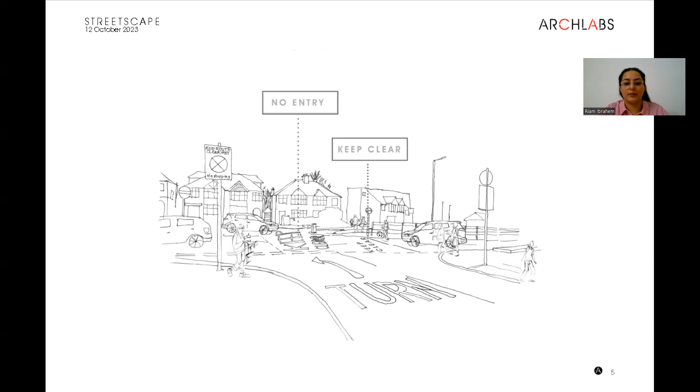It's an unsafe crossing on a dual carriageway in Edgware, before the roundabout, which is right there. People just cross from here to there, and mostly the people affected by this crossing are those who live on the closed road, which is here.

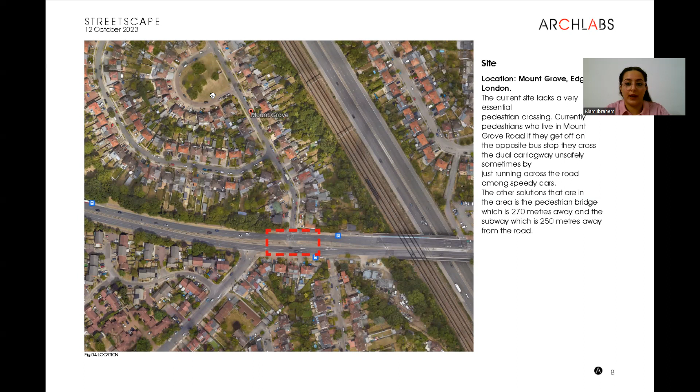I'll show this next. This is the location of the crossing, and this is the closed road, called Mount Grove, in the area HA8.

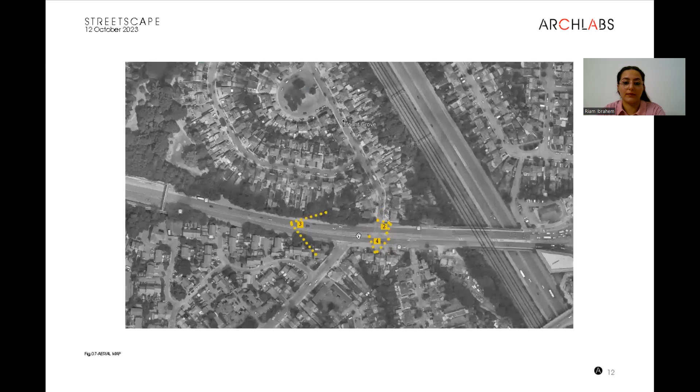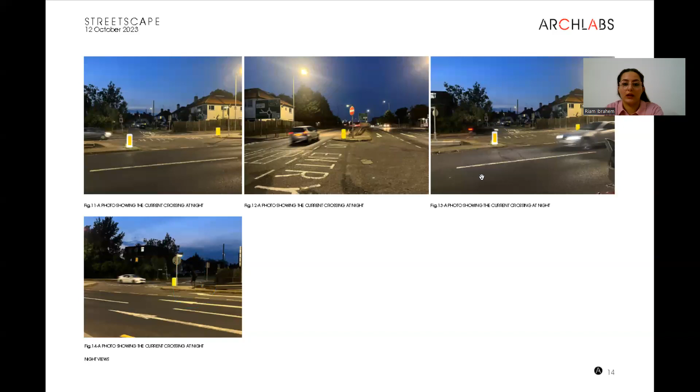You can see a guy here crossing there. There he is. Okay, very unsafe, very dangerous.

The issue is that the people who live here, even if they want to use a safe crossing, are very far, 250 meters away from the road here.

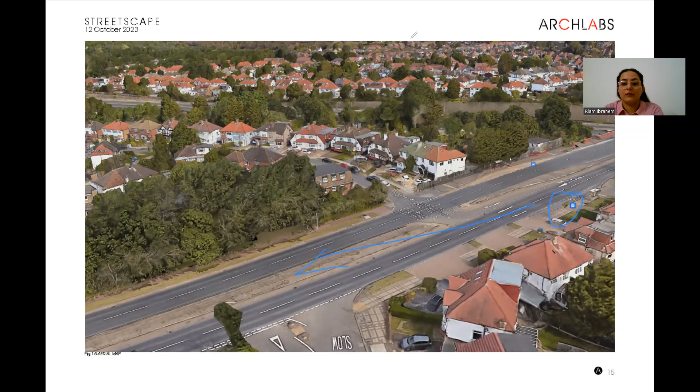And if they want to take a bus, the bus stop, which is here going that way, they would also need to use this crossing.

These are a couple of site observation sketches showing the people. This is from the closed road looking at the crossing, which is here. This sketch shows the closed road, Mount Grove, and the crossing in the background, which is here.

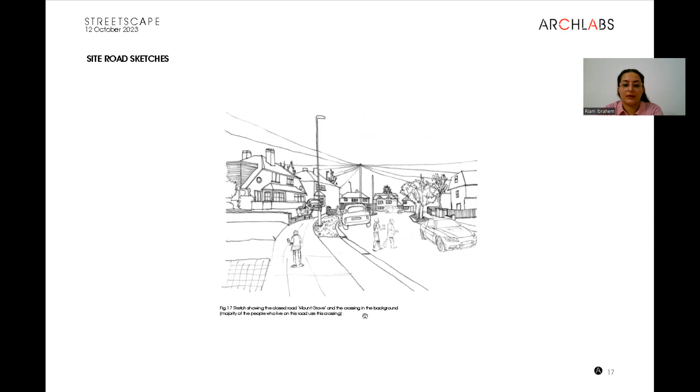The majority of people who live on this road use this crossing, like I explained earlier. This sketch shows the opposite road, which is here, and the unsafe crossing.

This sketch shows both, partially this side of the road and the opposite side.

It does say no entry for cars, but there's not much precaution for pedestrians or cyclists, really. So it's a road designed for cars only, I feel.

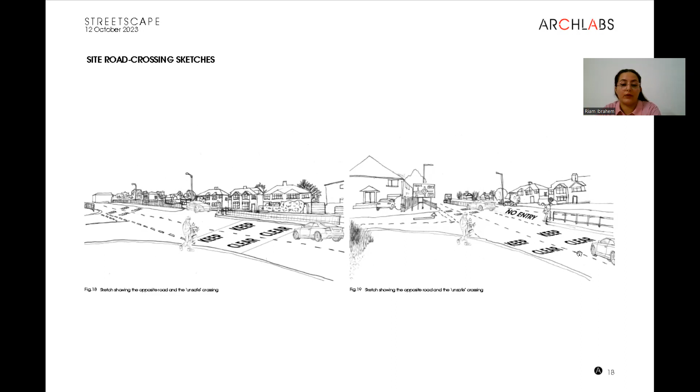This illustration shows the unsafe crossing, and you can see the pedestrian bridge there, which is 270 meters away from the closed road.

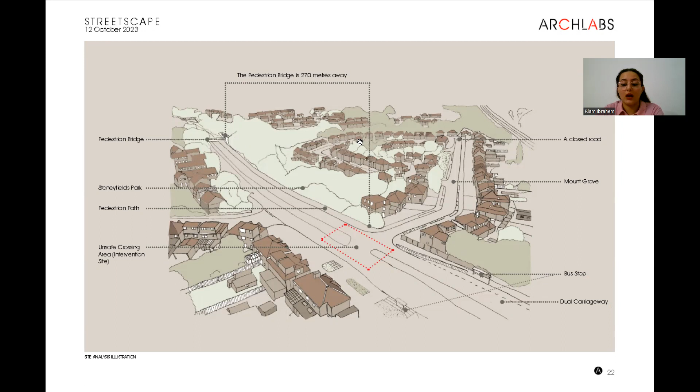There are 2 bus stops, and there is a park there, so there are some kids around the area.

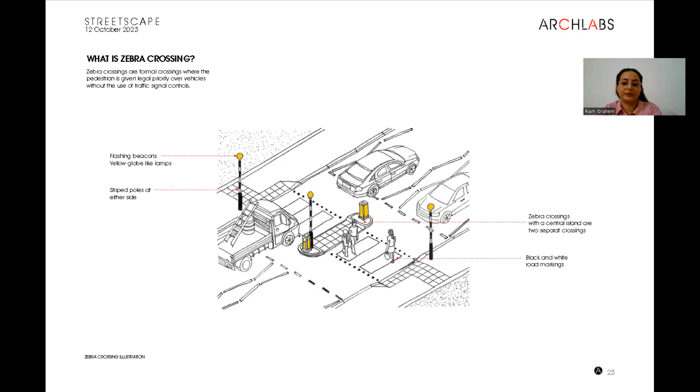So I was planning to propose a zebra crossing into this, which I felt would be a minimal intervention.

So I went ahead and started brainstorming into a diagram. What is the project looking at?

It's looking at a passage that connects the two areas for cyclists and pedestrians, a place in Edgware, though it could be anywhere.

It's an architecture, a light structure — and what about the shadow? It's for local people; cars have no entry. How safe is it? It's a scene.

So I'm looking at the event of crossing, and a scene. It's a modern piece of architecture.

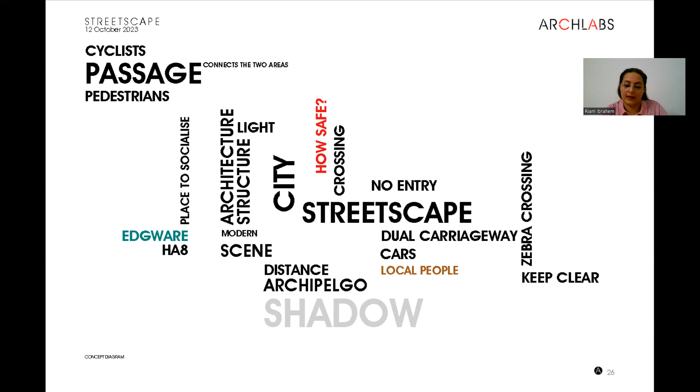Like I said, the precedent architect I'm looking at is Bernard Tschumi. He's an architect and theorist, and one of his most interesting projects...

...is the Advertisement for Architecture, made in 1976: 'To really appreciate architecture, you may even need to commit a murder.'

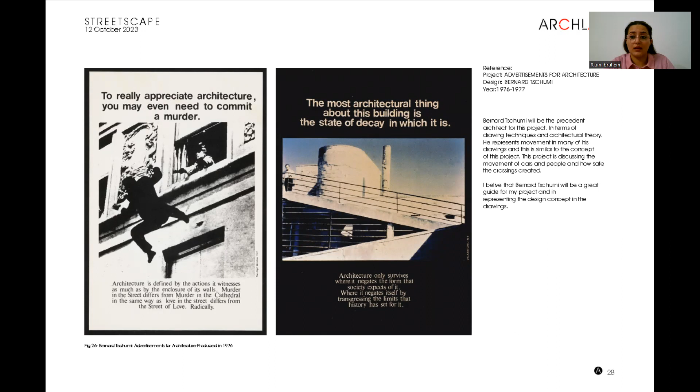And this kind of shapes my path in this project, because it's a matter of questioning how safe these crossings are for people, and the event of actually crossing.

And how he sketches, how he draws these, kind of makes them into little drawings, like storyboards.

Which I am planning to follow in my own drawing style as well, asking: how safe is the event?

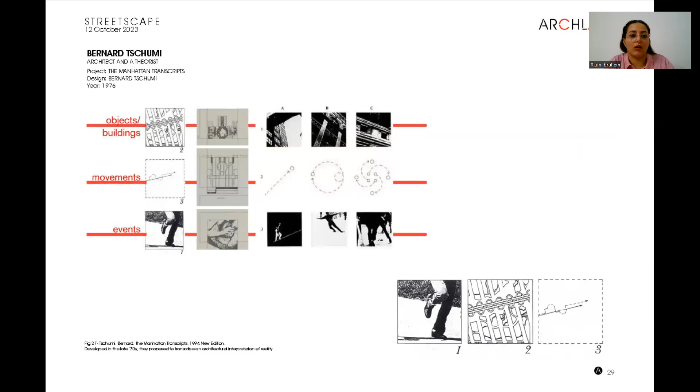So I started doing that right now in my sketches.

First is the event, which is the event of actually crossing, and number two is the object, which is the crossing itself, which you can see here.

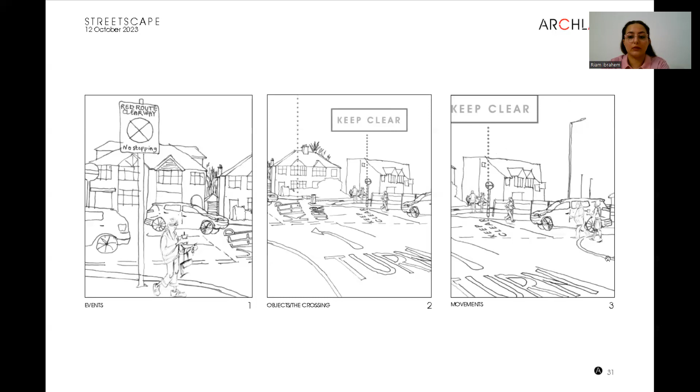Number three is the movement — people moving, cars moving, people moving and crossing. And this kind of leads me to look at...

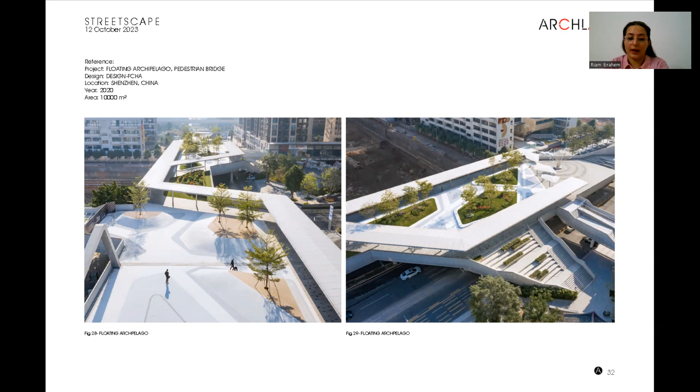...precedents for the design, what type of design I am looking at.

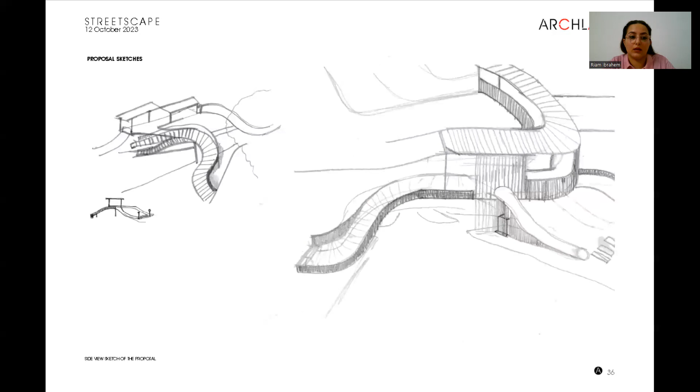These are old proposal sketches that I was doing before I looked at Bernard Tschumi.

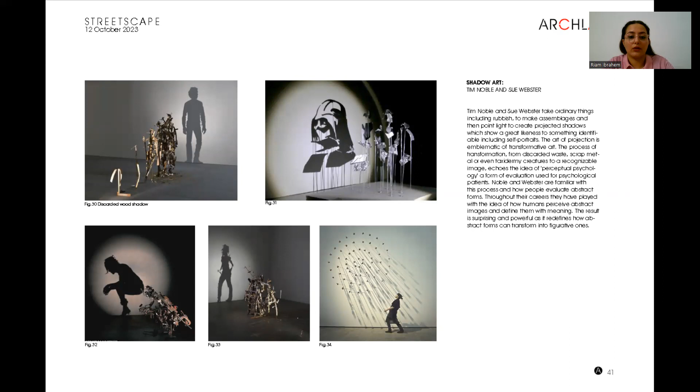So this is the latest update for this project, and that's it for today. Thank you for listening.